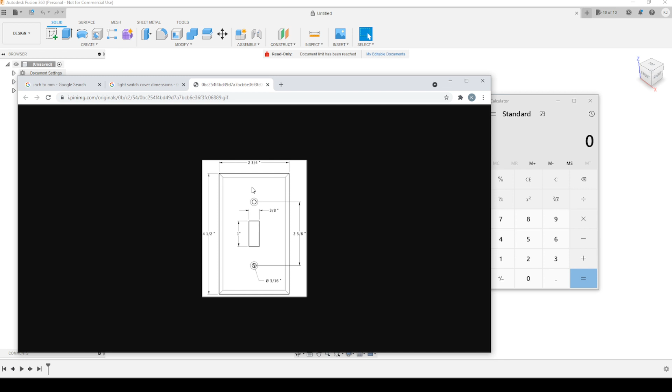For this time around, it's a light switch. So where I like to start first is anytime I have a blueprint like this that needs to be converted, take all these measurements and go ahead and convert them. Get you a little pen pad, or bring up a notepad. I know it kind of looks all jumbled, there's a lot of things going on the screen, but we need to stay with it. By doing it all at once, it prevents us from having to jump back and forth between measuring and drawing and trying to figure out all the numbers at once.

So we're just going to get all of our measurements done. We're going to start with the biggest measurement, which is 4.5 inches. We'll go to the next one, which will be 2 3/4. And we'll just keep going down, to 2 3/8. What's our next measurement? 1 inch. We got 3/8. And then we have 3/16. I do believe that's all of them. If not, I'll go back and redraw it.

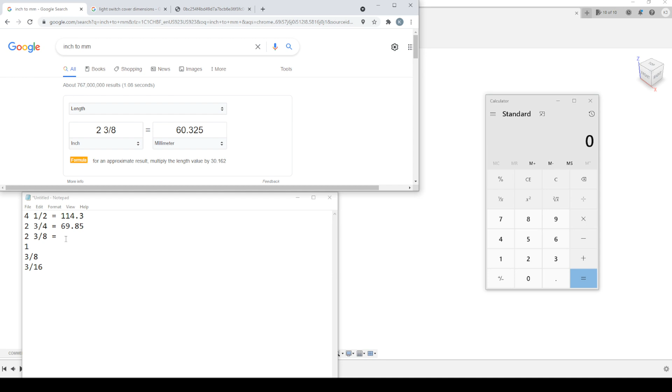So now that we have all the measurements, we need to start converting these inches into millimeters, which once you have your converter pulled up on the internet, is super easy. You just type it into the inches, you can even type it in just like it's written in the notepad. 4.5 is equal to 114.3, and you just keep on going down. 2 3/4 is 69.85. 2 3/8 is 60.325.

1 inch is equal to... sorry if you hear noise in the background, my daughters are crazy. 3/8 is 9.525. And then I think 3/16 will be exactly half of that, which is craziness.

All right, now that we have all of our measurements down, let's pull the picture back up. Why did I bring out the calculator again? We're gonna need it later. All right, we'll pull these out of the way real quick.

So now that all of our measurements are done, we can actually start drawing stuff out. Currently, I am using Fusion 360 for all my CAD designs. I do not have the premium version, this is just the standard. It's free for a year, I believe. I'm waiting for it to go on sale again so hopefully I can get the 3 years, but it's pretty expensive to buy 3 years of Fusion 360, at least for somebody who's doing this as a hobby and not making any money on it.

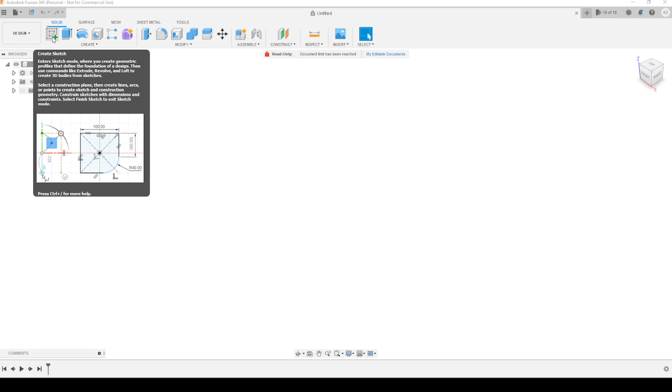Anyway, first thing we're gonna do is create a sketch. All right, build the top view. I should also mention that even though this is the free version and you can use it for a year, you're able to save up to 10 projects at a time. This works out for me because usually when I get done with a project, I just go ahead and send it to the printer and save it as a G code and STL, and then I upload it to Thingiverse for you guys.

So anyway, here we go. Now that we're looking at the top view, even if you're not using Fusion 360, a lot of these CAD programs work the same. You have a box on the side, you're able to swap between which view you want to look at, like so. And there's also, on most of the ones I've seen, a sketch feature that you can use.

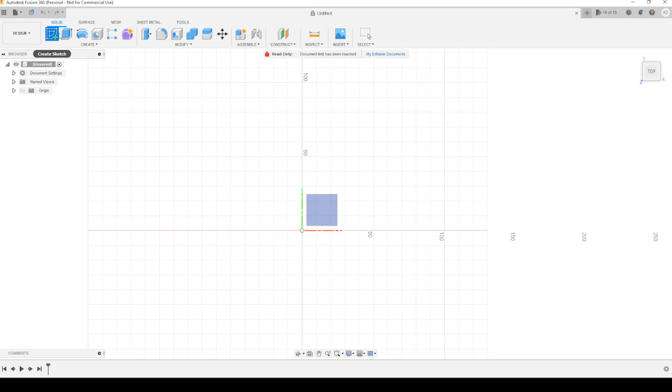Now that we're creating a sketch, we need to select which plane we're going to work on. Notice how all the grids ran away on you.

We're going to just start with a rectangle. Start from the center and start making a box, and you're going to get two dimensions pop up. As you can see, the dimensions get larger as you're moving the other end around. So we're not going to click yet.

Remember our little picture that we have here. We're going to do the outside box, 4.5 by 2 3/4. So we're going to draw out the square for that. And if you notice, we've already got our dimensions. It's going to be 114.3 by 69.85.

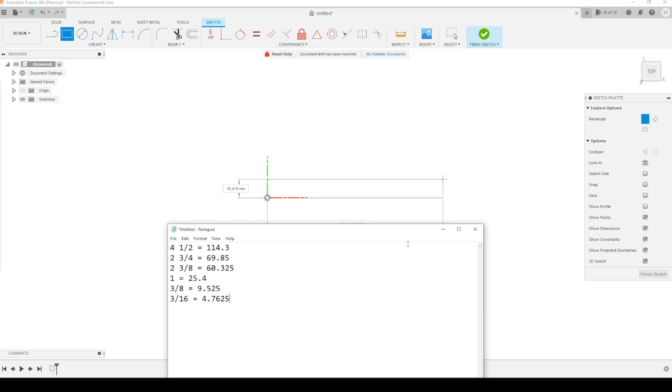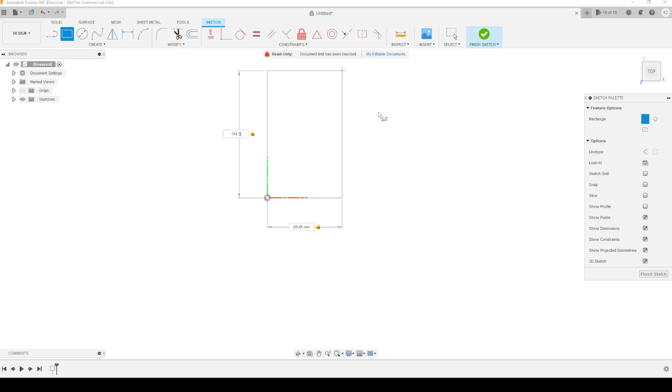You're not going to let me do it. Make another one, screw it. So the width is 69... giggity... by 114.3, 69.85. Double check, triple check, do everything that you need to make sure you got your correct dimensions. Cool. Here we go.

I guess it's okay to note that these numbers are also somewhat interchangeable. Because if you know anything about light switch covers, they're covering a hole that's quite a bit bigger than the hole that was drilled into your wall to run all your electrical through. So there is a little bit of playroom. I wouldn't go too crazy and make this super small, because it won't cover up the hole for your electrical stuff. You can make it as big as you want, as long as nothing's in the way, like a frame for your door. It's going to be different depending on what your room and setup looks like. But for now, we're just going to stick with the standard 69.85 by 114.30.

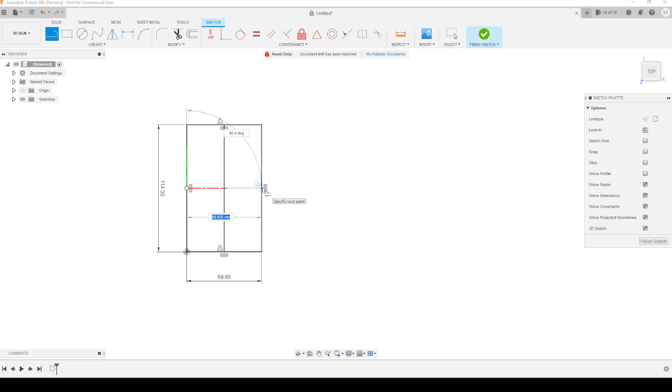Now that we have this, I like to find the center of whatever I'm working on. If you notice, as I'm dragging this line tool along the top, you'll see a triangle pop up, indicating that it's the center of your design. Draw it all the way down to the center, to the bottom. It'll also show up as a triangle on the bottom, just like here. These lines are going to be removed later, but at least I know where the light switch needs to be.

The light switch is 1 inch by 3/8 inch. So that's the next thing that we're going to need to draw out.

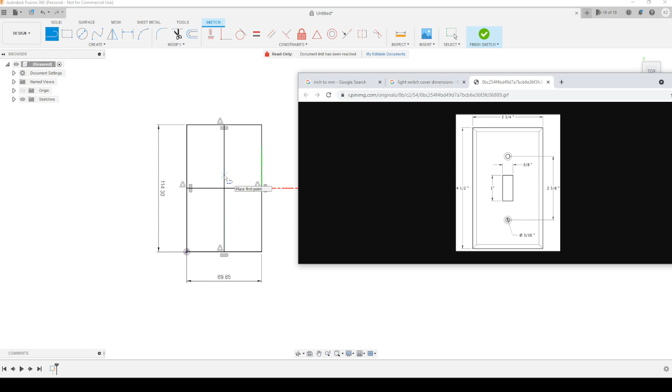One of the issues that I'm running across here, and I'm sure there's probably 10,000 ways to do it, but you can't really say, hey, I want like 1 inch going down. It just, I don't know.

So what we're going to do is start by finding half that 1 inch. Since we know this is center, we need to find whatever half an inch is. Since we don't have half an inch, we're going to make another designation for it. It's equal to, remember we have to pull up our converter, 12.7.

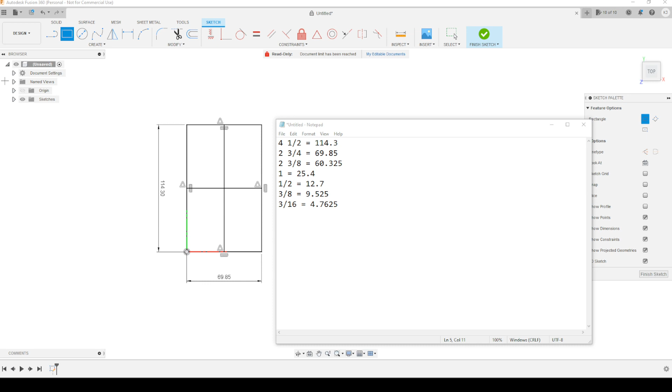We also need to know what half of that 3/8 is as well, which is 3/16. We already have the measurement for that: 4.7625 by 12.7.

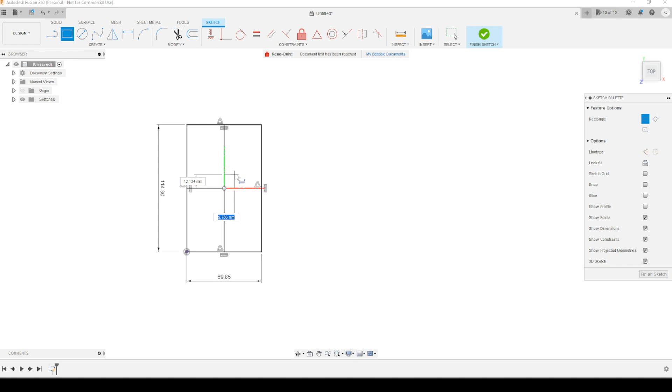So let's start with our little square. We need 3/16, which is 4.7625 by 12.7. So essentially what we have is half of your 1 inch and also half of your 3/8.

What we can do from here is go to this little mirror tool right here. It's a beautiful little mirror tool. You know what? Let's back up a sec. There is a tolerance on your 3D printer.

And it varies from 3D printer to 3D printer, and also it varies through the filament that you're using. There's a lot of variations to it.

And if you look at any light switch cover, it seems like the centerpiece where the switch comes through is really tight. And because it's tight, you want to give it a little bit of breathing room. So what we can do is come and click on...

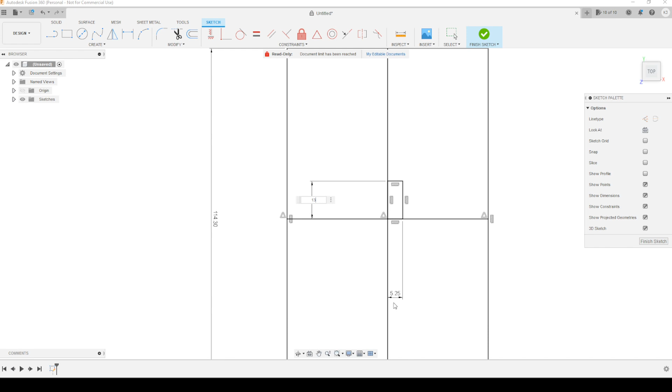And same way with this, we're just going to say 13. We'll just make it 13, just to give it a little bit of wiggle room, right? It doesn't have to be perfect. And if it's too small, you can always cut it out later with whatever tools that you're using. This is just my thought process on it.

So let's go to mirror, right? We're going to click the two sides that we want to mirror. It's going to ask you for a mirror line, right? So now we need to select mirror line, which we want this to mirror this way. Boom, draws it like this.

We're going to copy that, except this time we want it to say all of these, I want you to mirror it along this line. Boom. Now we're going to keep all these lines in the middle, we're not going to erase them yet. But this is where your actual switch for your light will come through the cover.

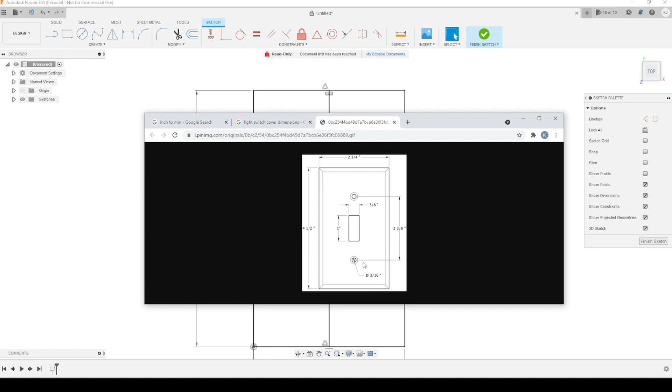All right, now that those are done, we also need to figure out where these holes are, right? I think this is where the calculator comes into play. It's 2 3/8 apart from here to here. One thing we can do is split 2 3/8 in half...

...to figure out where this is in correlation to that middle line that we drew, right? Because half of this will go from here to here, and then you multiply that by 2, it'll go from here to here, from here to here. All right, it's just finding out how far away it is from the center line by dividing this number by half, since we already have 2 3/8, which is...

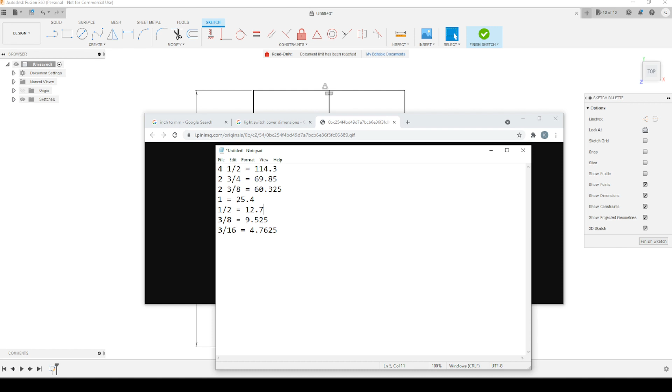60.325, that's where the calculator comes in. We're just going to say 60.325 divided by 2. So we're just going to make a little note here: 30.1625. Wow.

All right, let's get rid of you. So, 30.1625. Start drawing a circle. The circle needs to be, it's a 3/16 hole, which is 4 point...

Actually, it's another one of those things that can be adjusted. We're just going to say 5, since the number we're looking for is 4.7625, we're going to give it a little bit of breathing room. We're just going to round up to 5.

Now the distance from here to here, that's one that I really wouldn't play with very much, as far as adjusting it to like the nearest number, because that hole needs to be pretty much right at 30.1625.

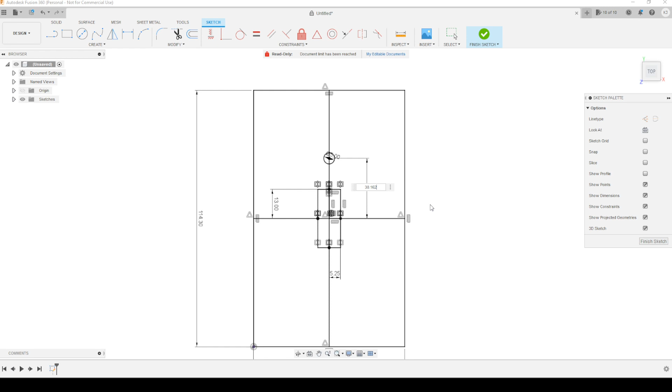One way we can get that distance is by sketching dimensions right here at the top. We're going to click on our circle and we're going to click on this line. This new line's going to pop up. Once we click, it's going to ask us how far away is this hole from this line. That's where we type in 30.1625, and when we hit enter, you'll see the circle move.

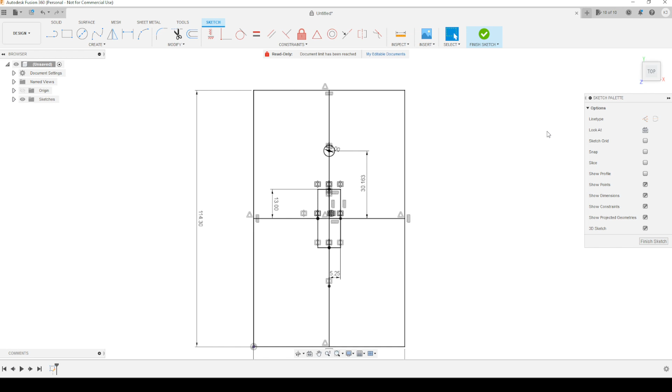Boom. All right, now that we have that, the mirror side to that, just, hey, I need you to mirror it along this line. And you see that little dot pop up. Oh great, well at least it gave us a little circle, a little place to show, hey, it goes there. Say, hey, 5.

Ta-da. Now, if you wanted to make sure you're in the right direction, remember it's supposed to be 60.325. Hit that sketch dimensions, hit the circle, hit this circle. Well hold on, because we just wanted to see what number pops up on it. And if you notice, it says 60.325, which is how far we needed it apart. So this is good. Now, technically, this is kind of done. We have everything.

We have everything drawn out that needs to be drawn out. It's 4.5 by 2 3/4, and these are 2 3/8 apart. We made this a little bit larger to make room, but it's also in the center of the light switch like we need it to be.

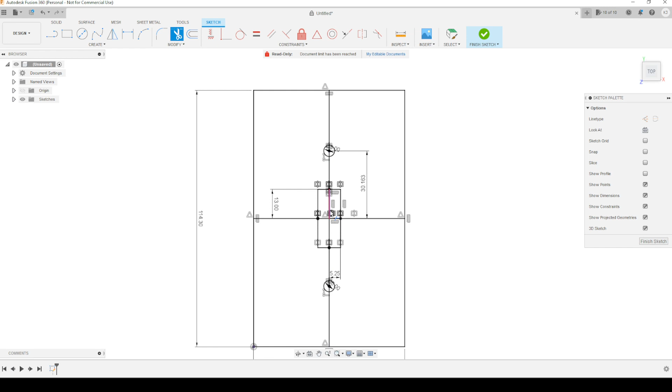Now we can use the trim tool, which you can click T for trim, or come up here and click it, doesn't matter, and come in and get rid of some of the lines we don't need. Let's zoom in here and get rid of these lines, just kind of clean it up a little bit. Makes everything a little bit easier to work with.

Okay. We can also make the dimensions go away. Now we have a clean area to work with.

All right, so the next thing that I want to do is insert a picture. Let's see, insert canvas.

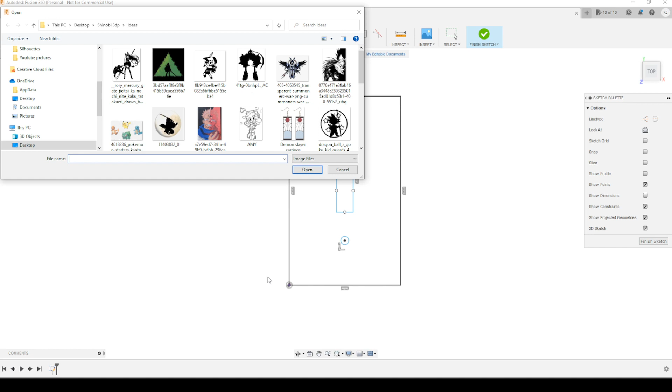From my computer, I've got all these pictures I've gone and looked for, silhouettes. You can find a lot of these. As far as selling your designs, you are basically not allowed to sell these items, because you are not the original artist. But what you can do is make fan art and give it away for free. You just can't sell it.

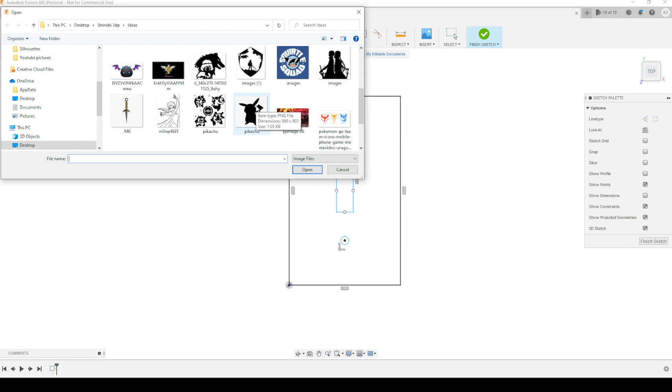But I'm going to click on this Pikachu design right here, and we want to drop it in right here.

Now that we have the Pikachu design done, I want to blow it up. Sit here and grab this little guy right here, start blowing it up. That might be a little too big. All right, see, this part you just have to kind of play with and get roughly where you want it to be.

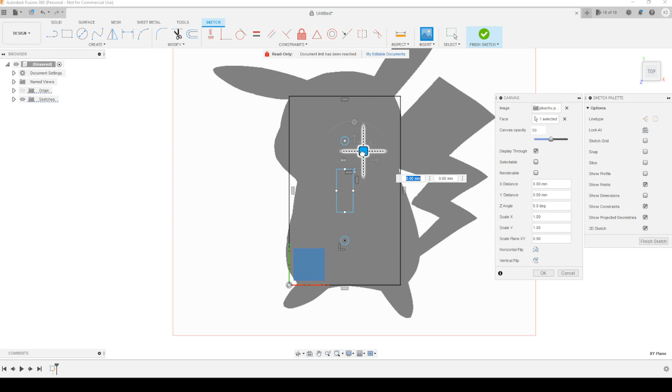It's okay if some of these kind of poke out. See how this line sticks out further than the Pikachu does? That's fine, because like I said before, when people install light switch covers, there's a hole, and that hole will basically be right in here somewhere. If it sticks out further than your light plate cover, you had a crappy guy come in who didn't do a very good job. But granted, if they did do that, you could always make your light switch cover a little bit bigger to cover up that hole. But if it sticks out a little bit, that's perfectly okay.

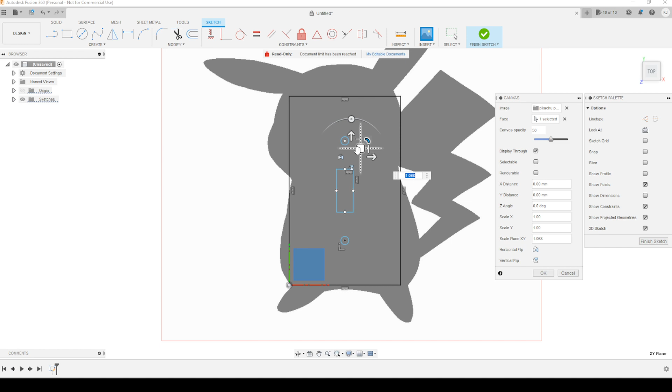And I kind of like the way this is sitting. Let's see if I can bring it up just a little bit. Down. I don't want it to be super massive. You can sit here and spend all dang day doing this, but it's pretty close. I like the way it looks. We're just going to hit enter. And now we have this nice little canvas.

One thing we probably could have done before we got to this point is draw another box. This box is going to represent how much room on your 3D printer you actually have to work with. You can just type into the internet the dimensions of your 3D printer, or the build dimensions, and it should tell you.

For me, I'm using the Ender 3 Pro and Pro V2. I've got two of them. They're both the same at 220 millimeters by 220 millimeters.

All right, so now we just say 220 by 220, and go ahead and drop it. You can tell the ear kind of sticks up a little bit here, so you just move it. The ear is in place. It fits all within, this whole picture fits within my build plate, therefore you should be able to build it.

All right, now that we've confirmed we can print it, now it's time to start going over the outline of this Pikachu. We can do that in two different ways: we can do a fit point spline, or we can do a 3-point arc. Honestly, they both work, you can even use the line tool. We're just going to get a little artsy with it and go over all these pieces. So I'm going to start with a 3-point arc.

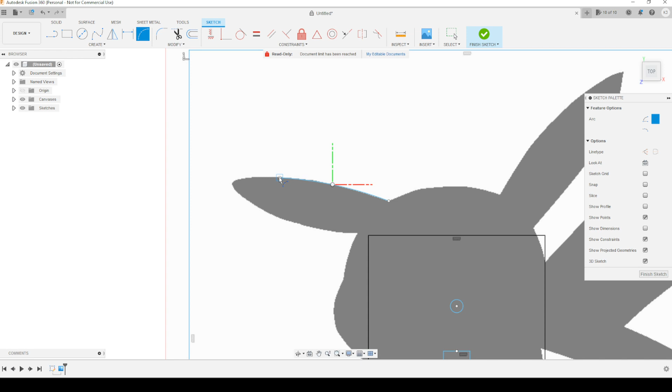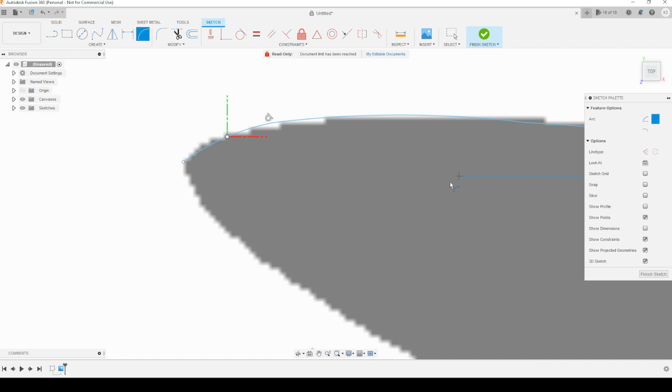It is good to note at this point that it doesn't have to be perfect, okay? We're not looking for perfection here. Because as long as you see how far we're zoomed into it, the 3D printer is not going to pick up a lot of that. It's going to do the best it can, but as long as you have... I'll just show you this white stuff poking out, it's not following along here. Well, let me show you what I'm talking about when I get done with this and we move the picture out of the way, and you can judge for yourself whether or not it's close enough.

Can you tell what I drew? And if you think it looks super messed up, I mean, I'm just gonna leave that on you.

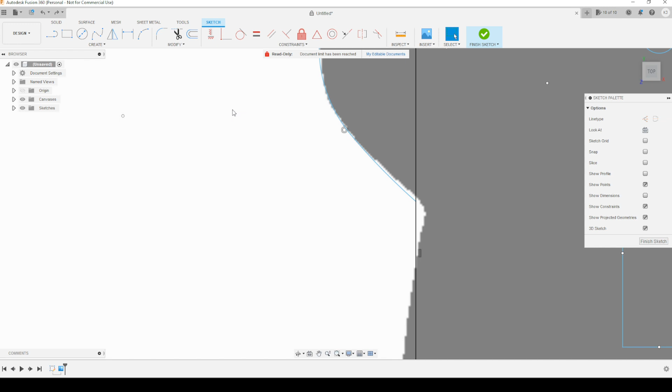See, I don't like the way this jerks back up. It's too high. Back it up just a little bit. You can get away with a little bit. Now, I wouldn't try to push your limits on what you can get away with.

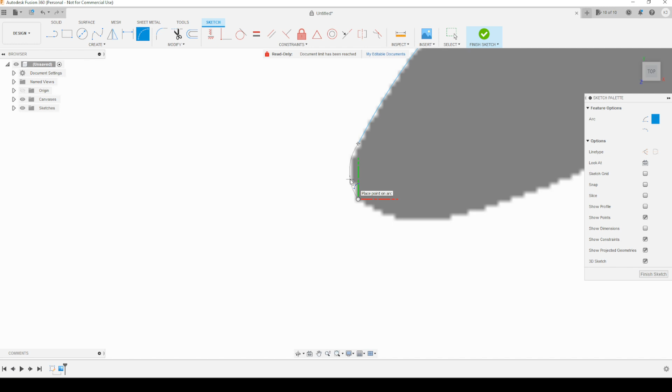And a lot of it, I mean, it's point and click. Oh, this is a slow process. It's just really hard to kind of talk through this because it is really repetitive. I enjoy it personally, but trying to find the words to say while going through here is kind of weird. This is normally when I'll just insert music, so that I'm not just randomly saying bull crap.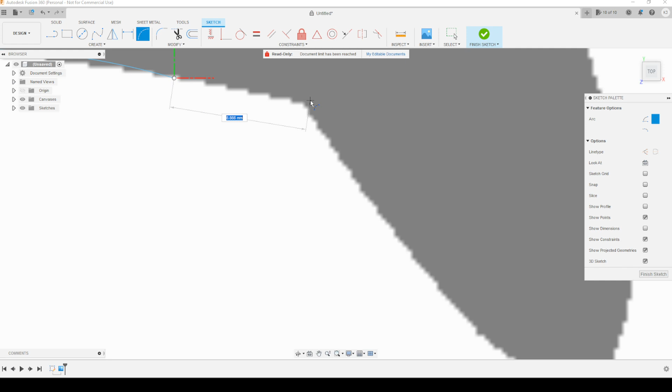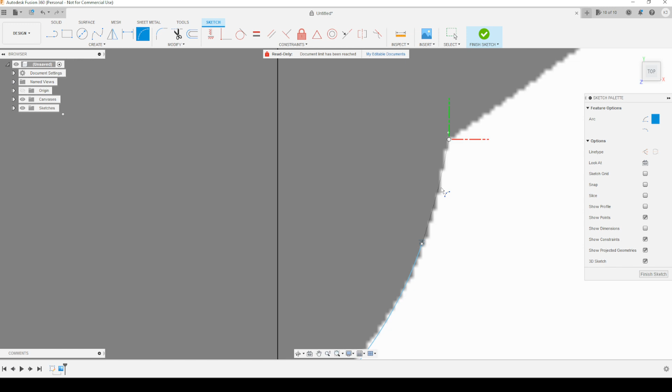What I can say, I guess, is something to point out. I haven't been doing this for a long time. A lot of people are complimenting me on my work and kind of wondering how I do this stuff. I'm not a professional, man. It's just a hobby that I wanted to get into so that I can turn everyday items into something that's unique. I mean, how many Pikachu light switch covers have you seen? And the fact that I can come through and make stuff like this, it really... I don't know, it makes me feel good about myself in a way.

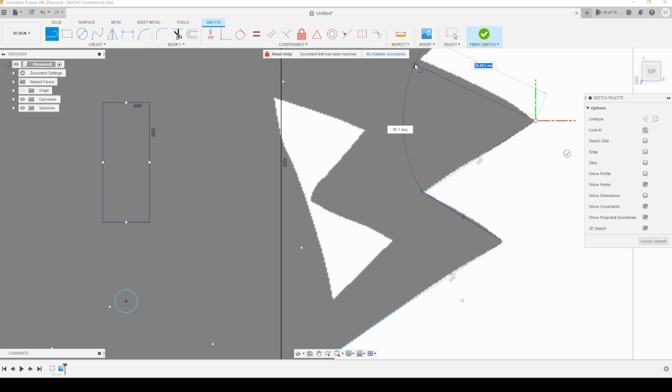And I hope whenever you guys do your own designs that you're proud of your accomplishments and the things that you're able to do. And I really hope that by following along with this video that you're able to accomplish, you're able to build things and feel good about yourself.

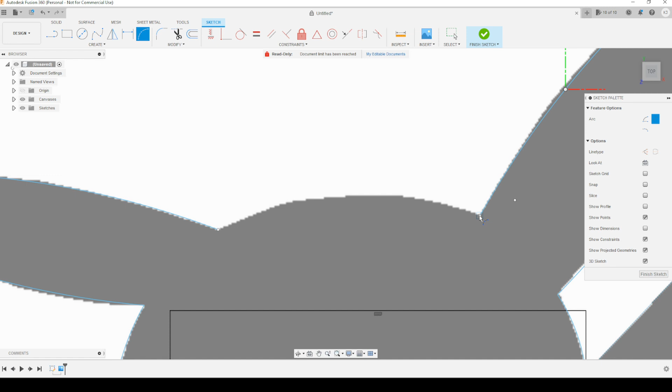Okay, we also need to come through and draw this little tail. I think the tail would look real nice when it's all said and done. So we're gonna hit the L button to make a line. You also have a line tool here, since these are straight edges pretty much.

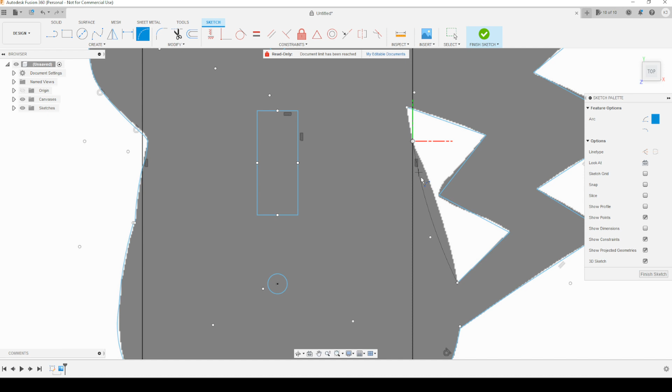And now that this is a curve, we want to go back to our 3-point arc. Sometimes it takes a minute for it to load what you just did. Boink. All right, and look, like I said earlier, I don't necessarily follow the lines exactly, right? But even though I didn't follow the lines exactly, let me remove the canvas and you tell me what it looks like. Looks like a Pikachu. All right.

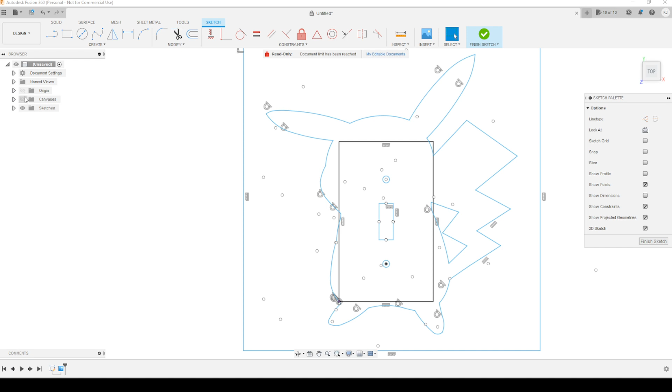So now that we've done that, what I can do is remove some of these lines from the light switch cover itself. Oh, let me take a step back. All right, for like a little trick. Before we even get to the point of dropping a canvas on this Pikachu, once we get done building this light switch cover, that would be a good time to save your project as a light switch cover base.

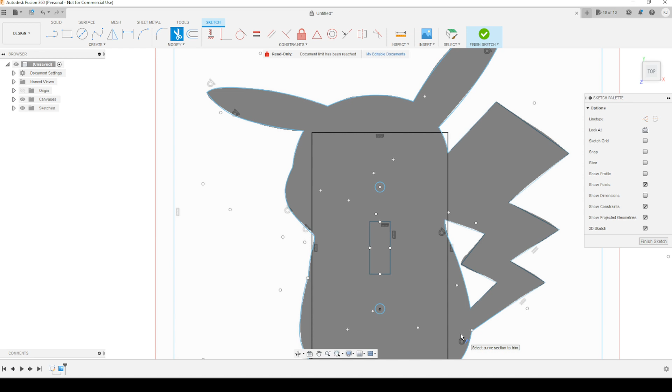Okay? With you having that as its own little project, once you get done drawing your Pikachu on the canvas and you've printed it and saved that as a Pikachu light switch cover, then you're able to just open up your light switch cover base and start right there, so you don't have to redraw your light switch cover. All right, moving on, let's go ahead and remove some of these extra lines.

So now Pikachu has become your light switch. Let's remove the canvas. This is what it looks like now. You have your Pikachu, you have the holes where the screws are going to go into, and you have this hole right here where the light switch is going to come through.

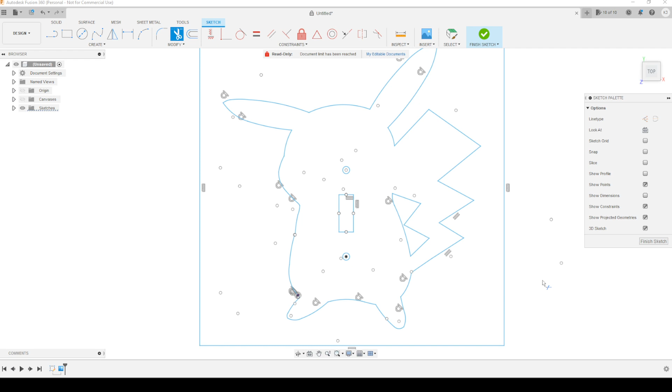I like what I see. It fits inside of our build plate on your 3D printer. So before we go any further, we need to click this show profile. And this is why.

Somewhere along this picture, because it's all lit up, like this, this is a square and it's an enclosed square, so you can extrude just the square right here. But because the Pikachu and the surrounding area is all blue, that means there is an opening somewhere.

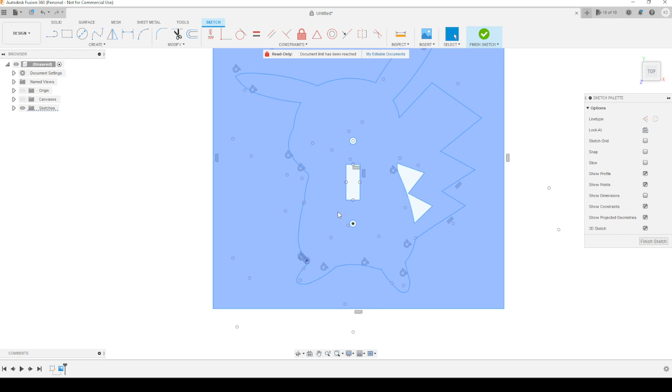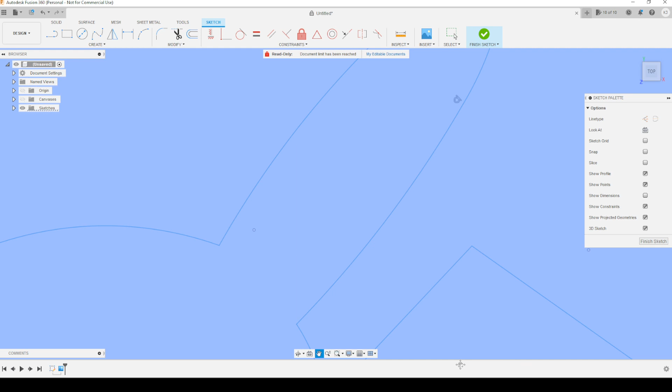We have to find out where the hole is. And you may run across this problem yourself. Hey, there it is, right here.

A little trick then, now that I know where it's at, a little trick for you guys. Take this line tool, since you have this giant box around, and draw down the center. By doing that, it says okay, all of this is closed.

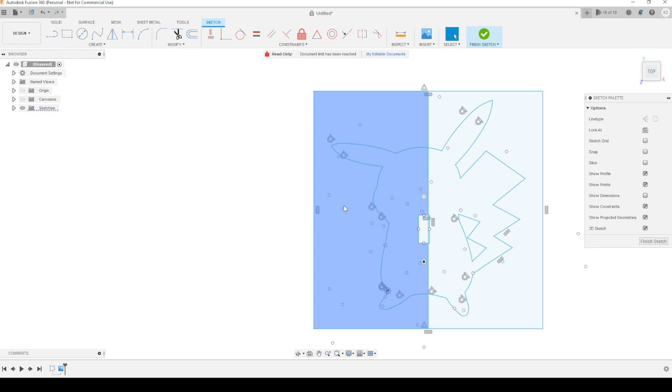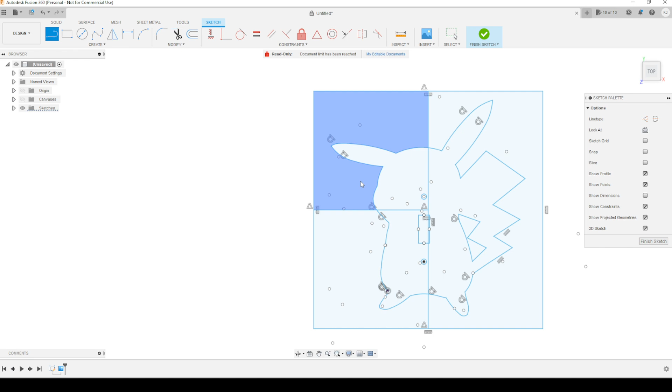But this is open, see how it bleeds, the purple bleeds into the rest of the picture. Then since you know it's on this side, take your line tool, go from here to here. This is all enclosed, this is open.

So now, since this is all open, we know that it's only in this part of the picture that it's opened. And then, I mean, you could take that a little bit further, if you just cannot find it, the hole's real small.

It's not showing a halfway point. Oh, there's a halfway point. Well, obviously it's within there, duh. It's not showing a halfway point. Anyway, make your own halfway point. Click, drag it over, click. This is closed, this is open. So it's open, or the opening is in this area along this line.

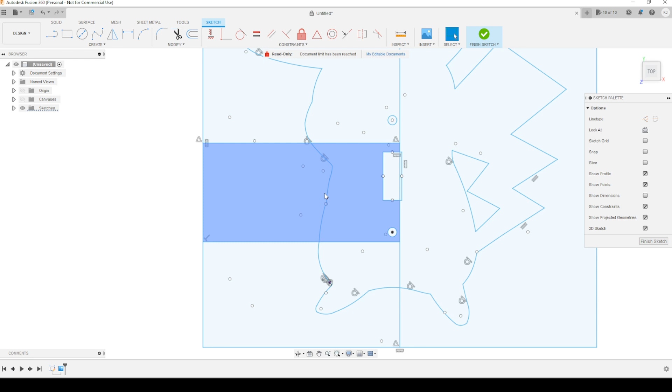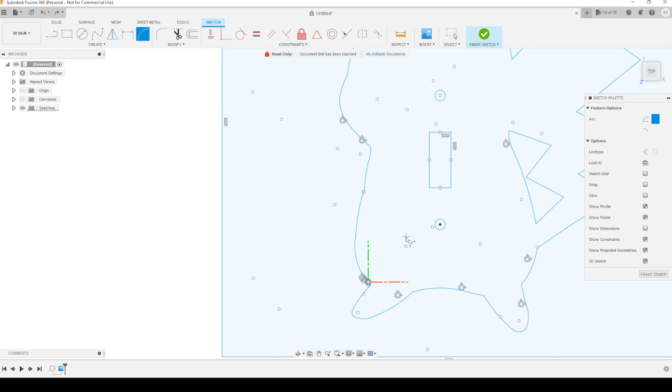So that's one way to go about figuring out where exactly your opening is. So we're just going to Control Z to remove those lines, and we're just gonna kind of remedy this, kind of look at the picture itself. Maybe pop the canvas back on.

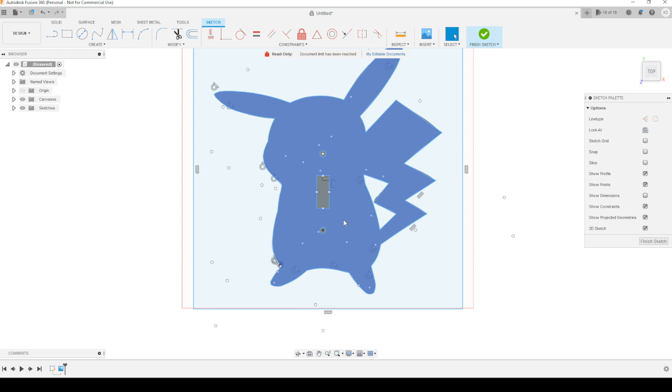Let's say, okay, click this line, hit delete. Hit the Z button for your 3-point arc. Let's turn the canvas back on real quick. Ka-chow, alright, ta-da! Now our profile, show profile.

Profile is showing that there is no openings anywhere. It's not bleeding out into this, right? And I think we are officially ready. Let's hit finish sketch.

Now that we're here, what we're going to do is come up here to the extrude button, okay? The extrude button, I'm pretty sure, carries through whatever CAD program that you're using.

And we're gonna hit this Pikachu, because we want this Pikachu. Extruding takes it from a 2D point of view into a 3D point of view. We're gonna add depth to it now. Basically, extruding means adding depth or taking away depth. For this, we're adding. So we clicked our Pikachu.

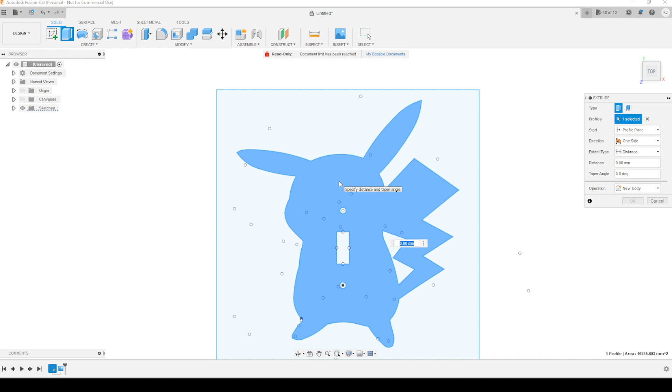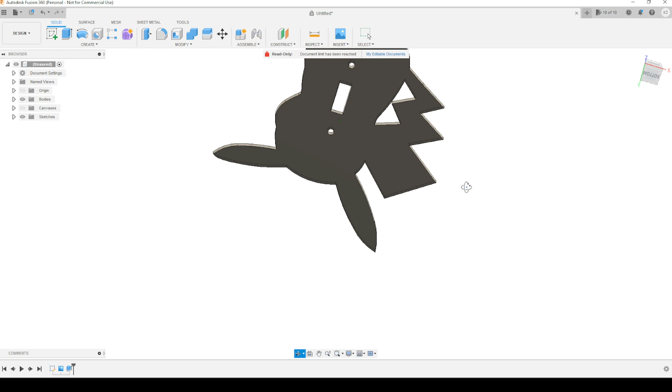I know from building these things before that they're roughly about 5 millimeters deep. Hit enter on it. This is what you're looking at. Now we can look, it's 5 millimeters deep. Looks real good.

Look on the top view again. So from the top view, we're looking straight down on top of Pikachu. We can flip it around to the bottom view. Now we're looking at the underside of Pikachu.

Let's see, how do we want to go from here? If you've ever looked at the back side of a light switch before, this part, it's not a solid block that goes over it. There's actually depth to it, or there's almost like a suck back, if you will. That sounds bad, I don't know how else to explain it, but this isn't a solid piece. That's what I'm trying to say.

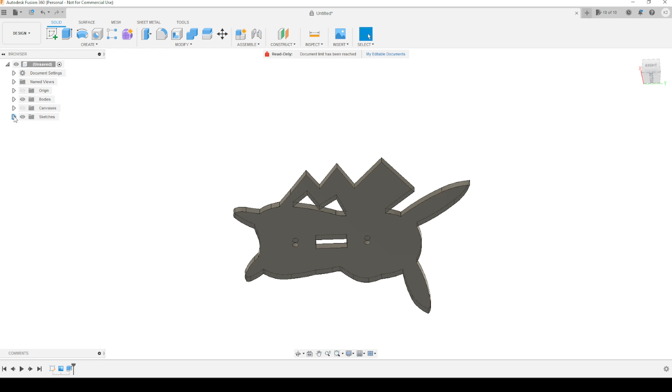It's almost hollow. So to do this, we're going to look at our sketch again. Actually, we need to go back into our sketch mode. So what we can do is hit the sketch here and say we're going to edit the sketch. Rotate.

Flip it back onto the top. I'm going to show you how to do this, my bad.

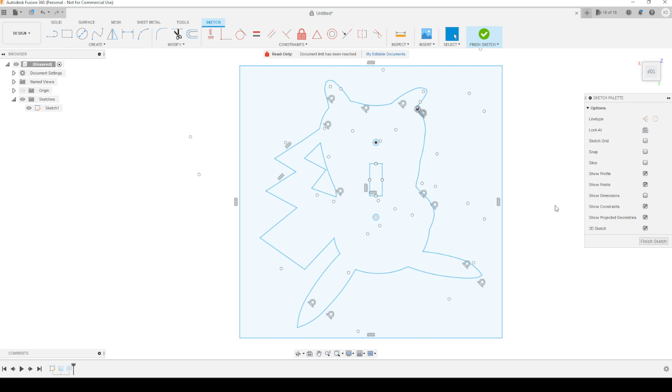What we can do is offset, because I want to make a rim around the outside of this Pikachu. And I'm going to make a rim around these holes here too, and I'll show you what that's for later. So let's say offset. This might take a little bit of finagling.

It did not take any finagling. We don't want the offset to go on the outside, we want it to go on the inside. So instead of saying 1 millimeter, we're going to go -1. Now the offset's on the inside.

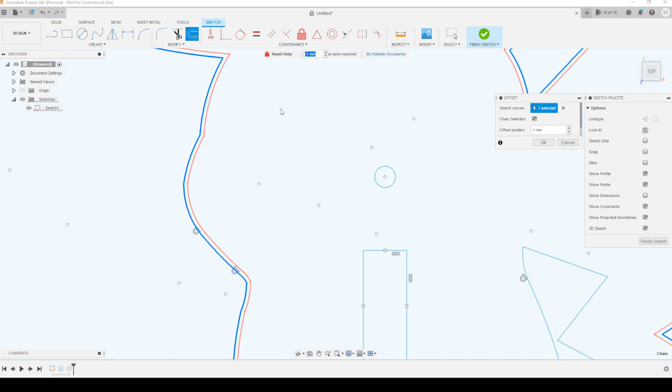Now what this is going to do is make a rim around the entire structure. With this offset position, we need to tell it how big we want that rim to be. So we say 2 millimeter rim all the way around it, the inside. And I like it.

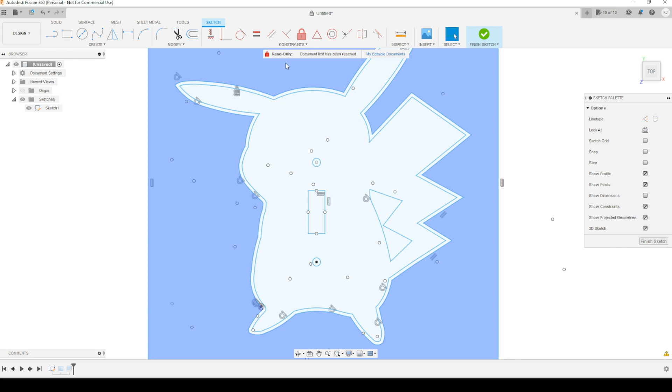So we're going to go with that, a 2 millimeter rim. Offset, we're going to go here. It needs to be a -2. Ka-chow.

We're also going to offset this. No, it only lets me do 1. Fine, I'm going to say 2. Offset this guy, 2.

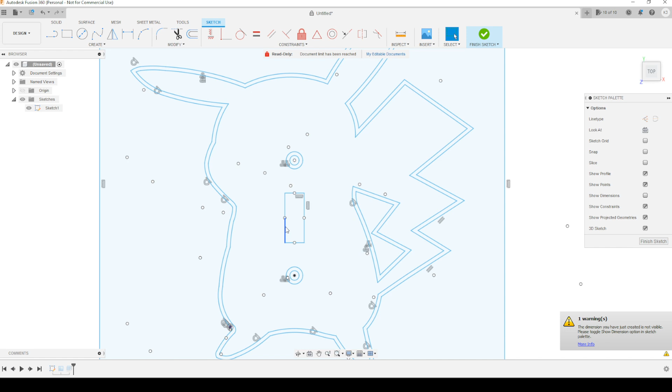I do believe this is just a hole. All right, that's all that's going to be. So now that we have a rim, we're going to finish sketch. Cool.

Now we need to extrude it. If you notice, we can't click on the Pikachu. There's a reason for that. When we extruded the Pikachu, we told it to go up 5 millimeters, so our sketch is now on the bottom of the Pikachu. Watch what happens when we flip it upside down.

Now we can extrude. We're looking at the bottom side, which is good. The bottom side of the Pikachu needs to be hollow, so this kind of works in our favor a little bit. So we're going to click, and we're going to do what's called a cut.

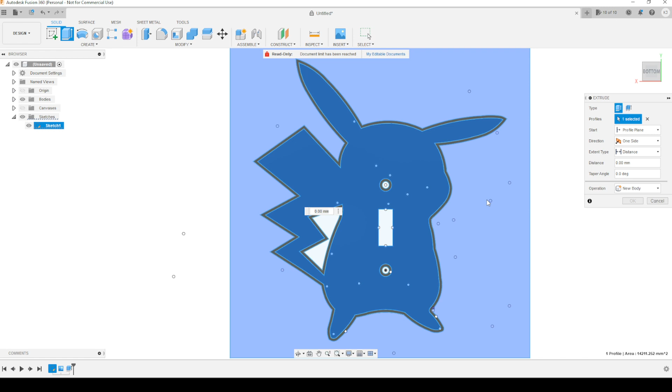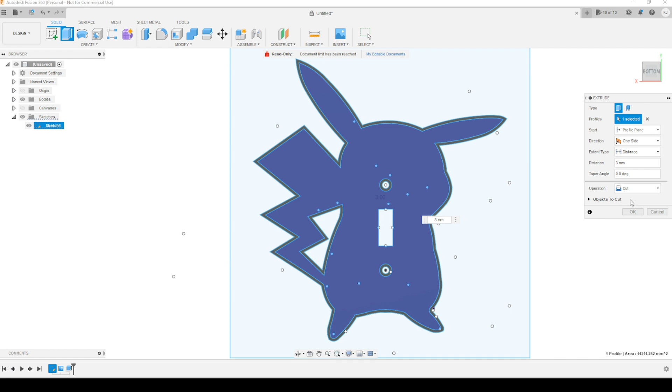Now that we have this clicked, we're going to specify how far we want it to go inward. Remember that it's 5 millimeters tall, so if we cut, we can't go any further than 5 millimeters, or it's called a hole at that point. So we're going to say like 3 millimeters. You can even go half, like 2.5, but I'm going to go 3. And it's automatically set to cut, so we're going to cut it.

Now when we look at Pikachu, there is a rim. Let's turn off sketches. Now there's a beautiful little rim that goes on, and this also cuts down on the amount of time it's going to take to print. It's going to save you on materials because it's not filling this whole thing in.

And trust me, if this rim wasn't here, your light switch cover is going to actually sit off the wall a couple of millimeters. And it still will as long as these guys right here are poking out. You're just gonna have to trust me on this one, guys.

All right, so we're gonna click this and this, and I want it to go down 2 millimeters. No, not up. Oh, well, I decided to click on all of it. Just want that, and I want that. I want you to go -2.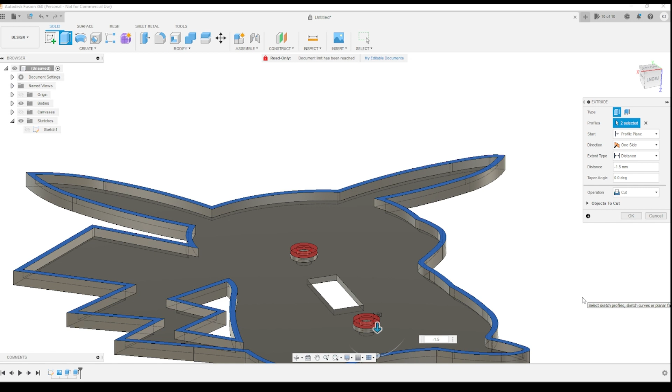Okay, maybe not even 2. -1.5, all right, we're just going to drop them down just a hair, so that they're still there. The bolt has something to sit on where it's not squishing this plate up against the wall, but it's got something to sit on that's nice.

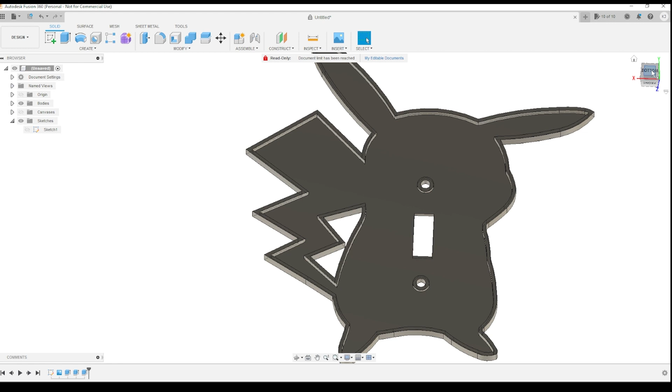So one more thing, because this is pretty much done. This is the bottom side of it, and this is the top side of it. Top side's nice and flat.

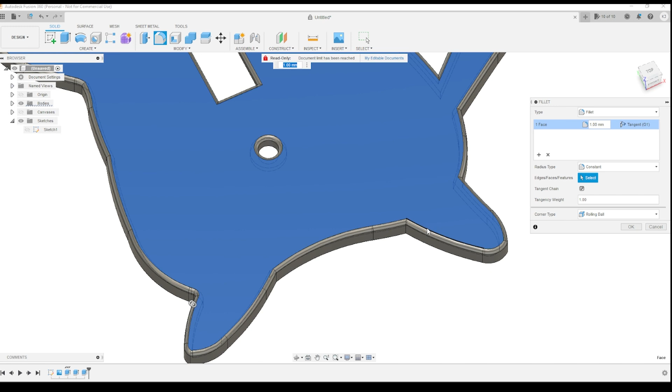One more thing that we can do is use this fillet tool here. And we can just give it a little bit of a roundness to it. See how it puts this nice little rounded edge on? That'll save you a little bit of material, a little bit of time, and it just kind of softens everything up.

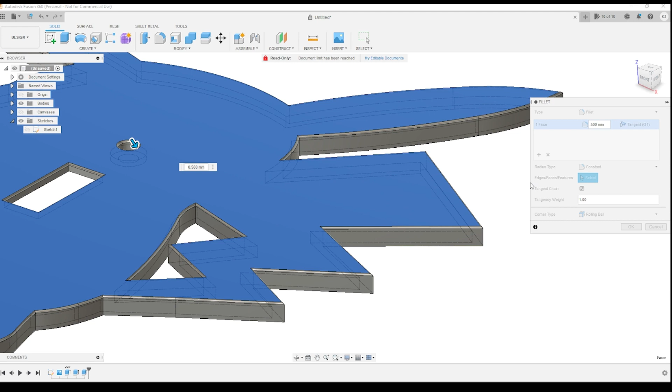If 1 millimeter is too much for your fancy, you can just say, hey, I just wanted a 0.5 millimeter. Cool, I like it. Also, another thing that needs to be done.

It's not gonna let me do it. Anyway, this Pikachu is pretty much done.

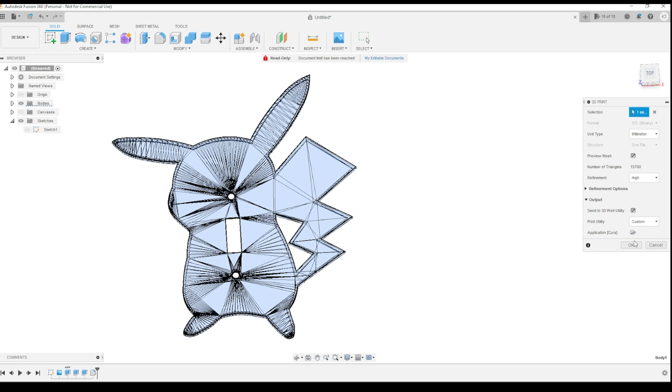The only thing left to do is come up here to file, then down to 3D print. You click on the object you want to print. If this is your first time using it, you'll have to set up where you want it to go — hit custom and point it to your slicing program. Mine is Cura, but use whatever you want. This isn't really a Cura tutorial, but whatever — we're going to look at how it's going to look on a 3D printer.

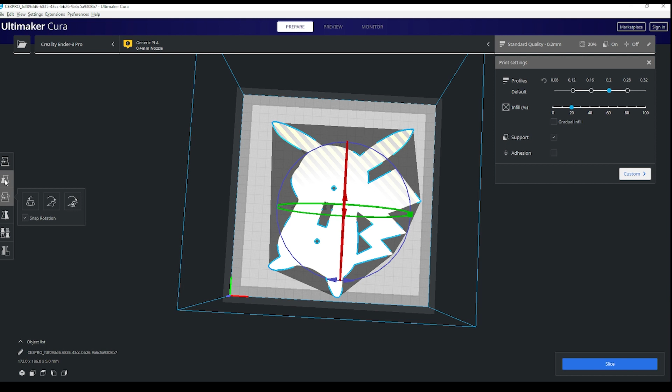Because we drew that big 220 by 220 box, it should in theory fit. First thing I'm noticing, it doesn't fit. Which is fine, because it looks like it just needs to be rotated a hair. Now that it's rotated, we're going to move it. Ta-da.

Now, if you remember, the bottom side has that rim, right? Which means when it goes to print, it's going to screw this all up. So we're going to kill two birds with one stone here. That problem being the first bird. The second bird is that whenever you're 3D printing things, whatever side you want to be smooth needs to be the side that's directly on the bed.

So by flipping this Pikachu upside down and putting the face of this light switch cover against the plate, that's going to be the smoothest part of your entire print. Which is cool because the back side of the print will be up against the wall. If there's any imperfections on it, you'll never notice — nobody will ever notice that unless they take the Pikachu off the wall.

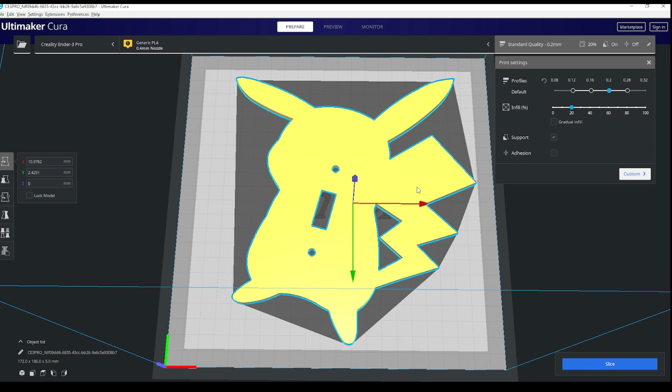So what we're going to do is rotate it. Flip, flip. Now we have to move it again. Another thing we probably need to do is rotate it — flip. Move it, move it.

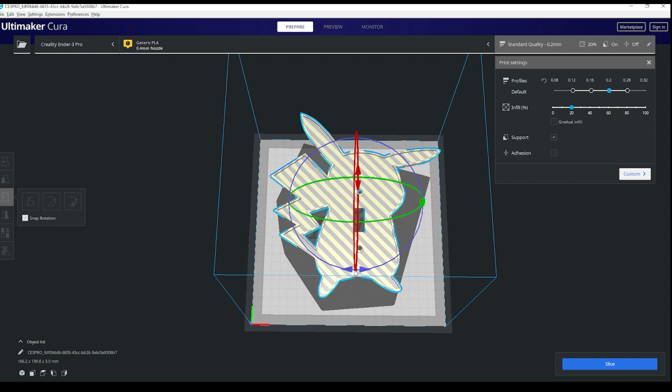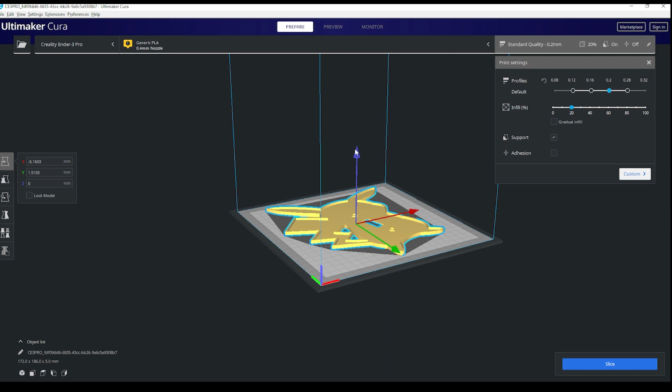Why aren't you sitting? This part you might have to play with a little bit. Let's figure out what's going on. Down, boink. Figure out why it's being difficult. There you go — now it's auto-setting it down on the table. You just have to play with it a little bit.

Do one last look over. We have the rim here, and the face is against the plate, which is excellent. It doesn't need supports, because there's really nothing to support. It doesn't need any kind of brim. It doesn't need to be super high quality, and the infill doesn't need to be much.

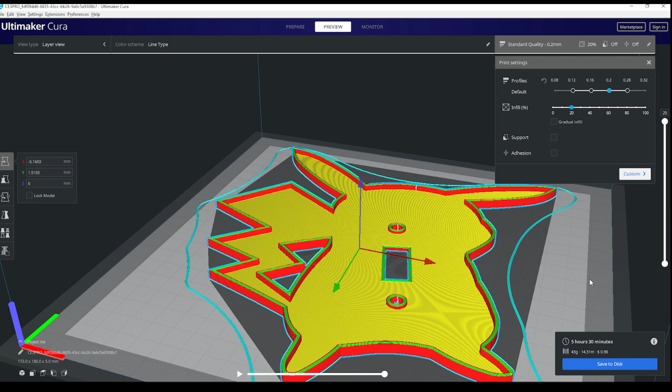So we're going to hit slice and look at it in preview. It's 25 layers thick. This is how your first layer is going to play out, and then we can just walk the layers up.

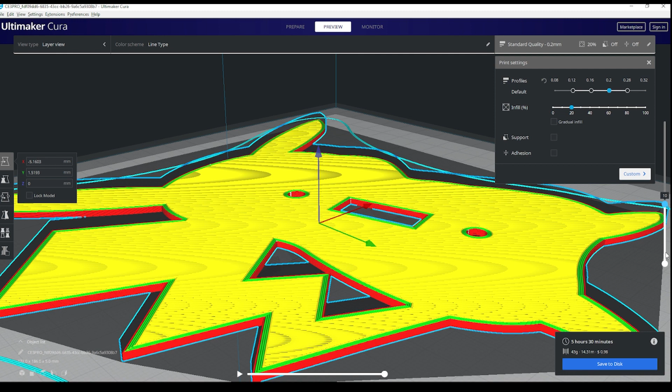Now, see, the first — what is it — the first 10 layers is all the actual Pikachu. Then the last 15 layers, out of the entire print, is just this rim, that's it. So it won't take hardly any time at all, because it's not taking all that time to fill in all this. It's just a way to save time, save money, save printing time.

But anyway, like I said, this is the thought process behind doing it. This was just a Pikachu — you can do literally whatever you want, and I have a couple of designs I've already done that I'll show you guys. I'd probably drop it on the Thingiverse page if you don't feel like copying the steps to make your own.